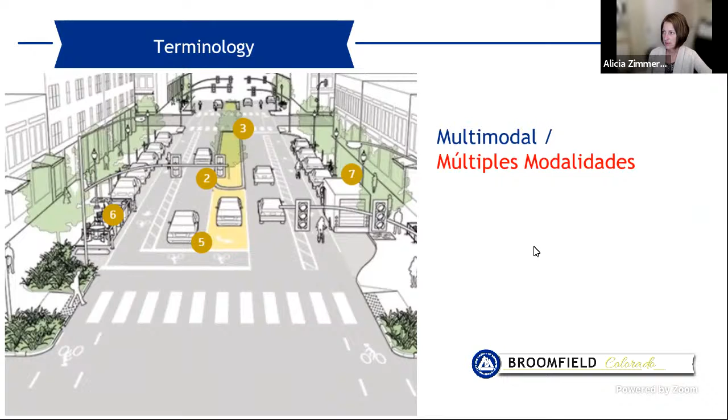The second of three terminology slides talks about what we call the back of curb. So between the curb and businesses or houses or buildings, in the public right of way, we often have a sidewalk. You're familiar with that term. If you look at this yellow brick road here, that's kind of a traditional sidewalk, set back from the roadway, and currently in some places it's a little narrower. That's what we think of as a sidewalk.

If you look at the orange stripe through here, if we had a sidewalk right there instead of the vegetation, that would be called an attached sidewalk because it's attached to the roadway. A multi-use path could be in either the orange or yellow locations and is usually a little bit wider, including people on any wheeled vehicle and those who are walking or running. So it typically adds those on bicycle into the pedestrian realm and increases the pathway. That's a multi-use path.

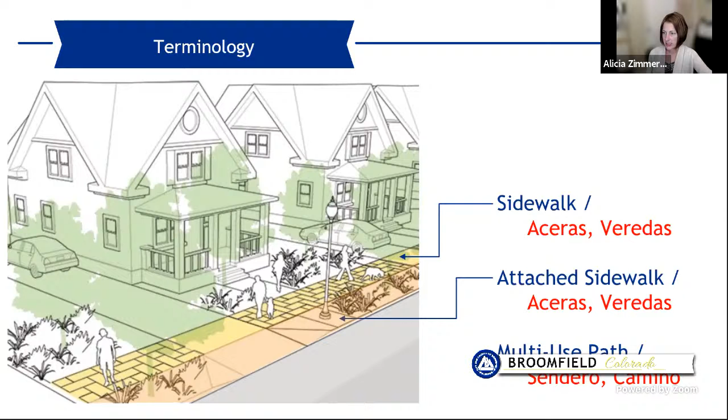The last one here, you'll look at the yellow areas highlighted for most of these. A pedestrian refuge is usually a raised space in the middle of a road, like number 2 over here, where a pedestrian can get partway across the street and be in a safe spot to wait before they proceed all the way across. The aim is to reduce the game of Frogger with a pedestrian refuge.

Bump outs, in the second bullet here, you can see this yellow bumped out area of the sidewalk at intersections. We'll talk about more details on them later, but that's what a bump out is.

Bike facilities does not have an arrow because it's a category. A facility in the transportation industry means something that is provided for a particular mode, so a bike lane would be a type of bike facility. Don't think building, but think maybe an area on the roadway or an area next to the roadway. That's what a bike facility is.

Protected bike lane is a type of bike facility, shown here as one particular type. Protected bike lanes have vertical protection, meaning vertical separation and horizontal separation away from traveling vehicles. Buffered bike lanes just have the horizontal separation, usually by striping.

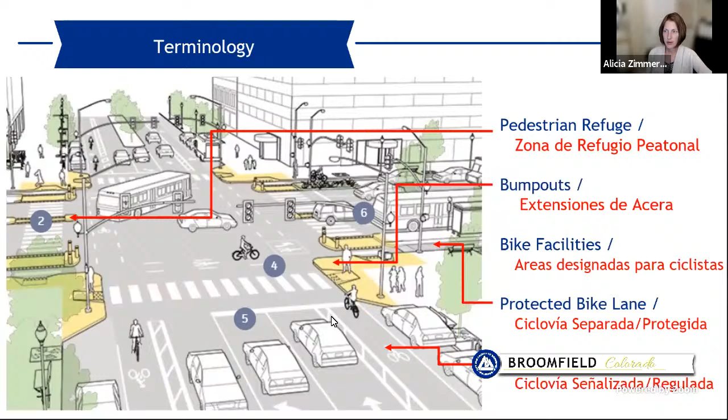So that's the end of the quick terminology intro, and I'm going to turn it over to Marc for the project background.

All right, thank you, Alicia. So once again, my name is Marc Ambrosi. I'm a senior transportation planner with Broomfield, and I'm project manager for Broomfield for the Midway Boulevard Multimodal Plan. So we're going to start off with some project background.

So we're going to begin going all the way back to the roots of what drives our transportation planning for planning staff in Broomfield, and that's the 2016 transportation plan. This document was developed with input from the public, and many of the policies reflect what we heard from them. So this is a guiding document that was really built by the people who live here, not just transportation staff or consultants.

So a few things I want to touch on, one that Alicia has already talked about a little bit. The first focus of the multimodal plan, and this was a big transition from pre-2016, was a focus on multimodal transportation. That's planning for pedestrians, bicyclists, transit, and personal automobiles as well.

The second big focus I want to talk about is planning for people of all ages and abilities. This plan establishes policies that ensure a safe, functional transportation system that works for all users. This could be children, older adults, people with mobility challenges, and really everybody. So we're really looking to plan for everybody, not just people in their motor vehicles.

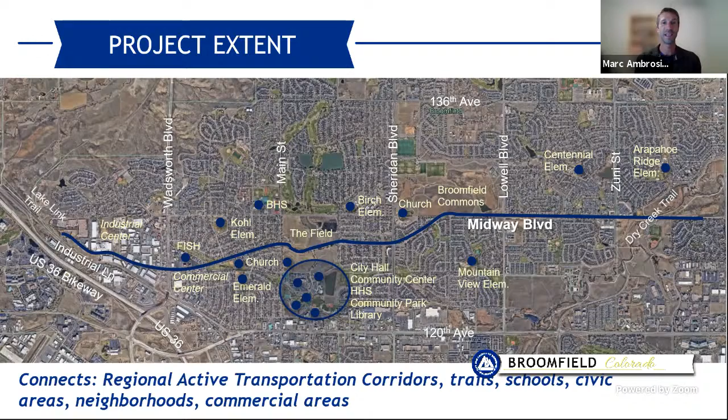So why are we doing this? We're really doing this because we need your help making this corridor safer and more equitable for everyone. We really want this to be a great community corridor. The residents of Broomfield have said that they want this to be a good corridor, a low stress corridor. Your voice is really essential in developing this study so that we get a corridor that's going to work great for the people that live here and use Midway Boulevard.

This project started in the spring of 2021. We developed a strategy for the project and how we were going to tackle this study. From spring through around now, we've been doing data collection and analysis, grabbing existing conditions. We also set up the website at broomfieldvoice.com/Midway plan, where you can engage with the project. We've been collecting public feedback in this phase.

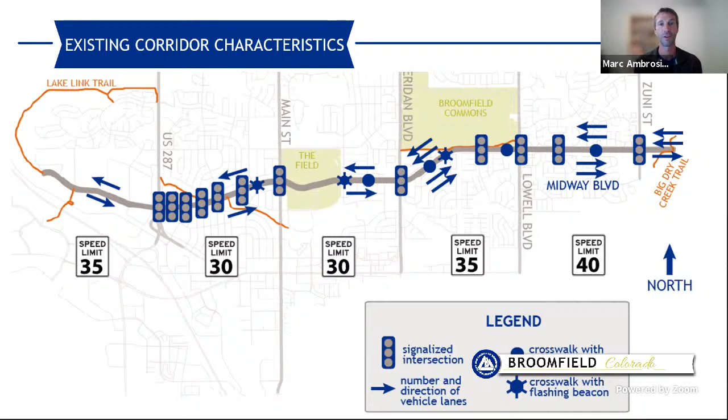What we're showing here is average daily vehicle traffic collected from the past few years, probably a 3-year average. The corridor overall has some pretty significant levels of traffic. There are lower levels west of US 287, moderate levels between Main Street and Sheridan, and everywhere else you're around 17,000 vehicles per day—pretty high levels of traffic.

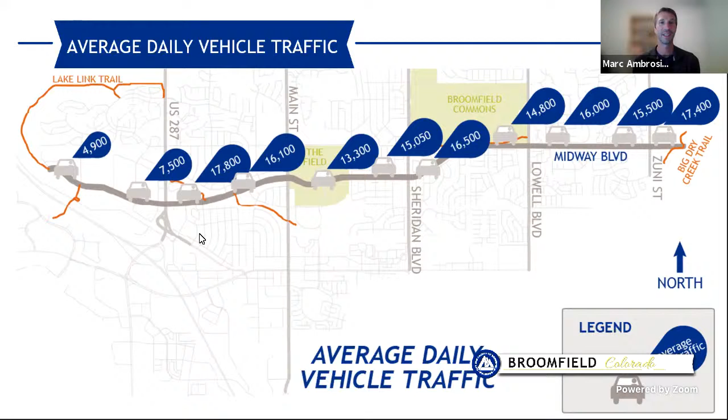This slide is a little more complex, so I want to spend a minute talking it through. I'll begin with the top half, the eastbound trips. This shows the percentage of vehicles traveling from a specific intersection—so 287, where the mouse is hovering now—all the way through to Zuni. These are vehicles that started at 287 and went all the way through to Zuni.

So 90% of vehicles starting at US 287 are not traveling the entire length of the corridor. Similarly, for westbound trips, we have a similar distribution where most trips starting at Zuni do not go all the way to US 287. About 90% of them are going somewhere along the corridor.

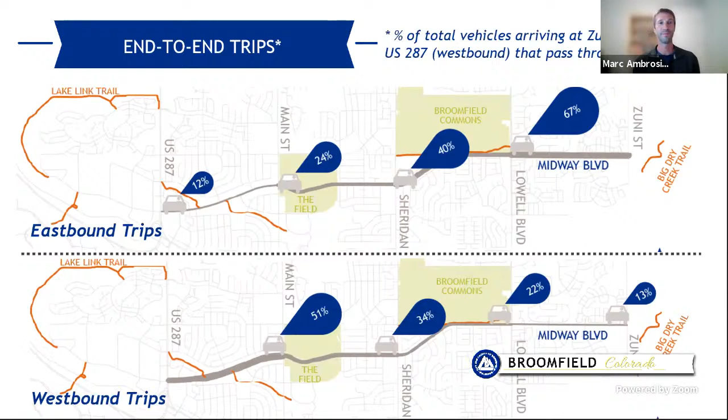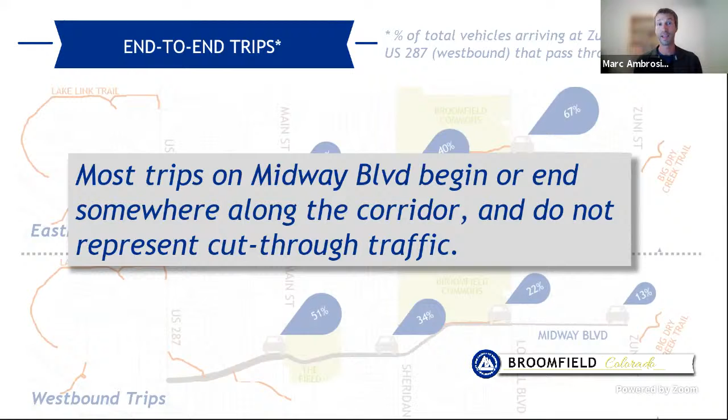So what does that tell us? We think it tells us that the traffic on Midway does not, in large part, represent through traffic or regional trips. It's not people coming from Thornton or Lafayette necessarily—this is people living in the corridor or along the corridor, traveling within it to get to their destination, whether it's their home, job, or something like that. I think that's a really important point when thinking about the improvements on this corridor and how we want it to change.

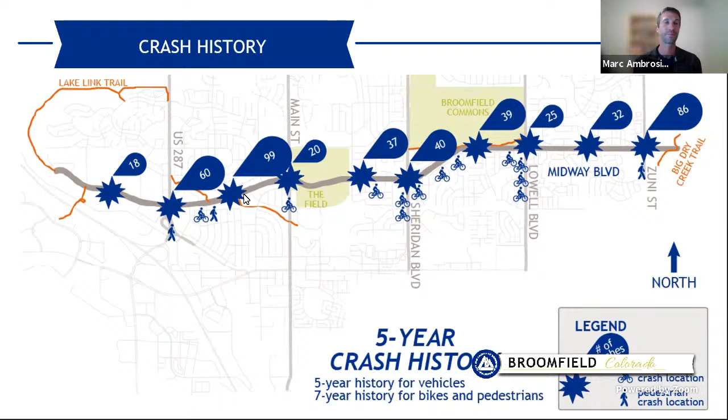All right, I'm going to turn it back over to Alicia to bring us through the rest of the existing conditions.

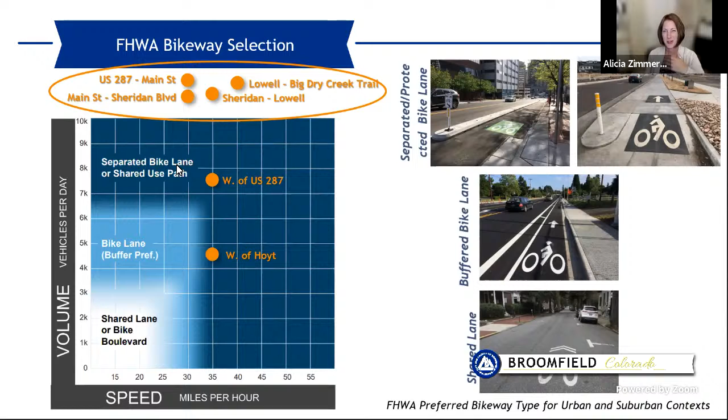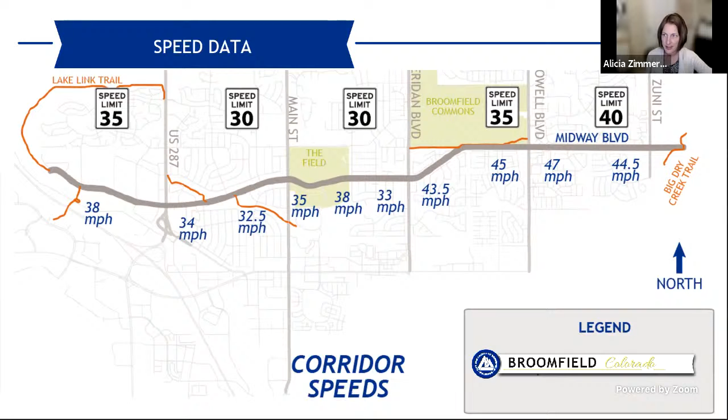All right, now I've got to get us back to the right slide here. Okay, all right, I'm going to hand it back over to Mark for the intro to our toolbox and ideas. Thanks, Alicia, and great discussion there during the Q&A session. So we are now digging into the toolbox and ideas for making improvements. I'm going to outline kind of how we're thinking about the corridor before turning it back over to Alicia to talk about some specific ideas.

So, to start, the way we are thinking about the corridor is character areas. What these are, we have grouped segments of the corridor into self-similar sections to the best of our ability. We tried not to get too many, but wanted enough to capture the diversity of the corridor. As you can see on this screen, we have pictures at the bottom showing different segments of the corridor that are all a little different. The map at the top splits up the segments as we look at them when exploring solutions to issues we find on the corridor.

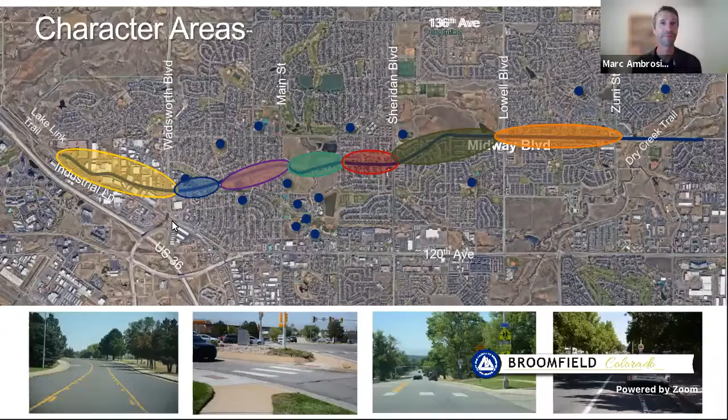So I'm going to start all the way at the west. This was that yellow bubble on the last map, the section from the Lake Link Trail to US 287. This section is pretty straightforward. It's the lowest traffic section, and there is the most heavy truck traffic. The land use adjacent to this area of Midway is largely industrial. There's a lot of pavement, and as you can see here, wide lanes. There are zero bike lanes. Sidewalks are narrow and attached to the roadway. This is kind of the section that's probably least inviting when you're taking a walk after dinner or something of that nature.

So this is a section where we have a lot of opportunity to make changes because we have a lot of space. And we would like to see this become a little more inviting and attractive for all users, not just those heavy trucks.

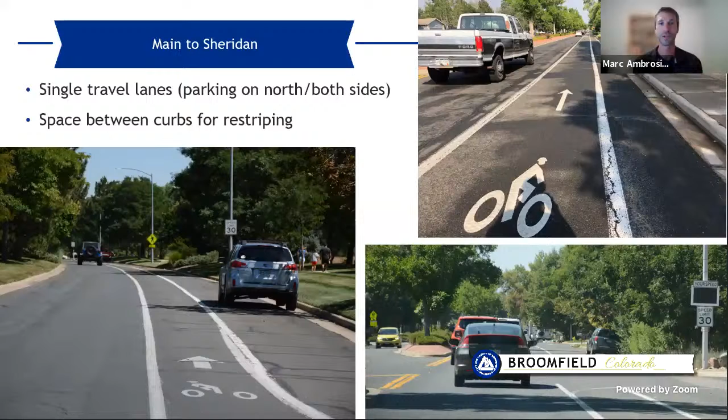The land uses adjacent to these areas are open space and residential primarily, so it's being used a little differently and looks a little different. In the space where vehicles travel, there is less space to make changes for bicyclists, and to be quite honest, it does not feel comfortable as a bicyclist riding next to two lanes of traffic. The speeds are pretty high, the traffic volumes are pretty high, and this is an area where it would be nice to provide a higher level of protection for bicyclists and potentially better pedestrian facilities as well.

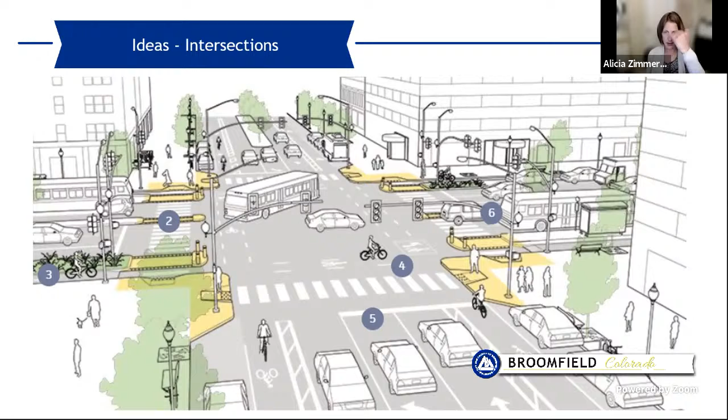I'm going to go through some ideas. They're separated into intersections, and we'll talk about intersections first. As I go through these, think about: could this be right for Midway? Could this be right for a portion of Midway? Is this just totally wrong? Does it not go far enough? I'll give a range, so be patient if it doesn't go far enough. Think about those things, because we'll have an opportunity for feedback in the last polling and Q&A.

So, ideas for intersections. One of the basic ones, which you all have some of around here in Broomfield, is a bump out. I pointed to a picture with a bump out before, but I want to tell you what bump outs can actually do. A bump out is this area here where...

Sometimes there's parking here, where the curb can come out behind the parking, often on both corners. The bump out can first reduce the distance a pedestrian has to walk across, so you feel less exposed and are exposed for a smaller amount of time, which can actually help with delay at some intersections because the signal doesn't have to give pedestrians a green as long.

It also helps reduce turning speed and even through speed. A vehicle traveling through here has increased what we call side friction, particularly if there isn't parking along here. Side friction is basically just a discomfort you feel along the side, which actually helps slow traffic.

It can help turning vehicle speeds too, because usually the radii, the curb corner, the round part, is different - the radius is smaller. So you might have to take the turn at 5 or 10 miles an hour instead of 15, which helps you see a person crossing the other road more easily. So it can help with speed mitigation and reduce crossing distance.

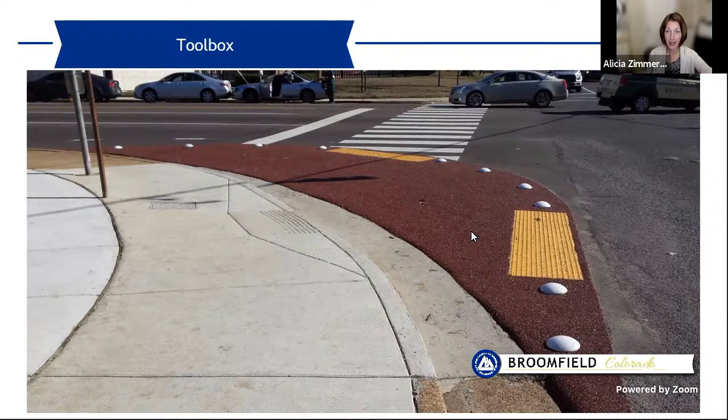This one is a little different, kind of a funky implementation, but it's here to show that bump outs can look very different. They can use temporary material, permanent material, or more visually impactful material. The previous picture I showed - what I failed to say - can also provide additional space for landscaping or art, kind of what they call placemaking, making something really a place. This version is a little more temporary, and it also allows trucks to turn over it, so there are nuances in designing to make sure everyone who needs to can get around the corner.

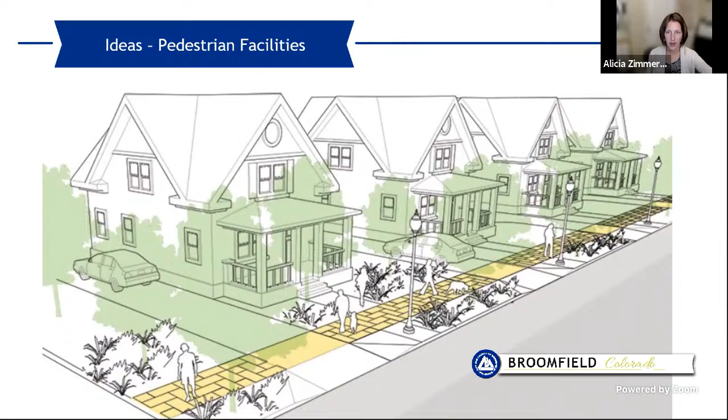So there are many ideas like this in some of the new guidelines we'll be considering as well. Okay, if you're still with me, we're going to talk through pedestrian facilities and then one other section next.

Mark talked about some of those wider sections, almost as wide as a multi-use path, while some sections have narrower sidewalks. So the first thing we'll look at is whether sidewalk connectivity and widths are sufficient for a comfortable pedestrian environment. If they aren't sufficient, or if we need to widen it to become a multi-use path, there are some gentler ways we consider widening. Where we have room to expand those locations with concrete, that's easiest to maintain and easiest to use. But there are more park-like ways of expanding those that reduce the impervious area a bit.

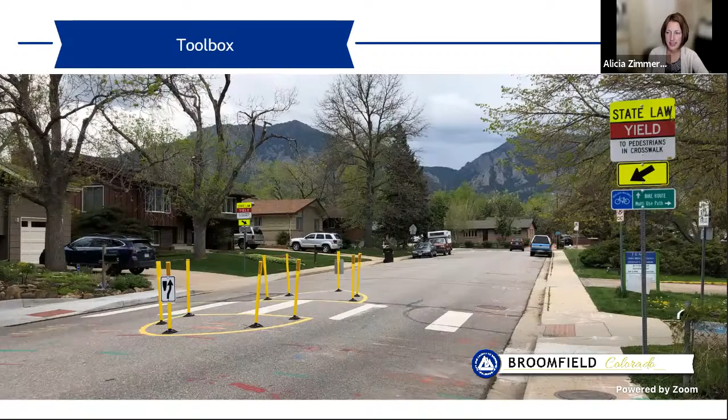This slide just shows you can do some of these treatments in a temporary or fast action, quick implementation method as well, with posts and marking signage, paint on the ground, and in this case, some additional brightly colored signage as well, which is per guidelines.

I want to make sure too that you don't just think of this from what can we put on the ground or what physical change can we make. We are certainly considering what we call operational changes. Outside of infrastructure changes, operational changes can change the number of seconds that each direction of travel can go, the number of seconds you get on green if you're in a car, or the, you know, man hand, what we call the white walking person when you're a pedestrian.

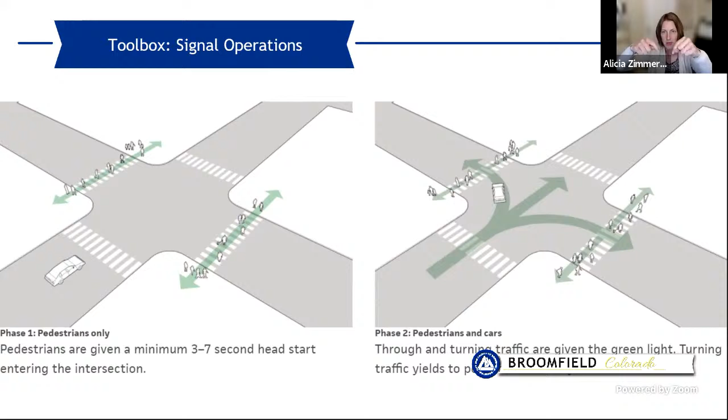This example, just the diagrammatic example, is what we call a leading pedestrian interval, LPI. All it means is that pedestrians get to start going. All the signals are red for vehicles in all directions, and pedestrians get to start going until they're partway in the road before that parallel traffic that might have that conflicting right turn goes. So these pedestrians get to go just a little bit so they can establish themselves in that crosswalk before a vehicle traveling this way gets a green light and could potentially turn right across them. It reduces the cartoon-start, both-starting-at-the-same-time challenges.

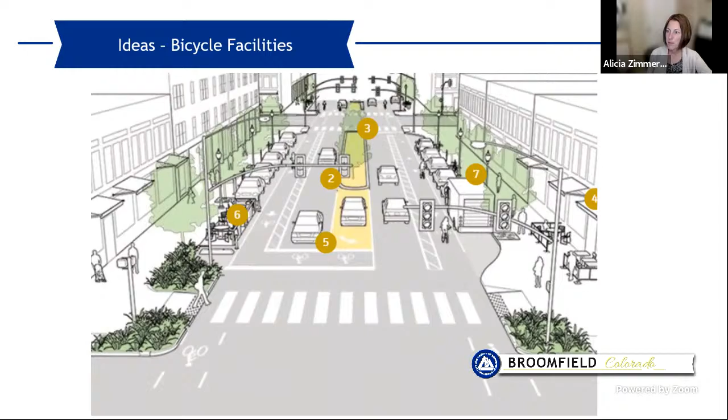We've seen some of these pictures already through some of the other sections, and that's kind of an important part, is that all of these systems work together. You see a refuge island in the making here. This is a buffered bike lane, and it also has some green paint. Right now, most communities are using that green paint for marking conflict zones, meaning a location where somebody driving may anticipate intercepting somebody who is on a bike, or somebody biking may say, hey, this is where a vehicle may cross. The other thing you see here is actually conflict marking for a bus stop, so you can actually make these bus stops and the bike facilities get along as well.

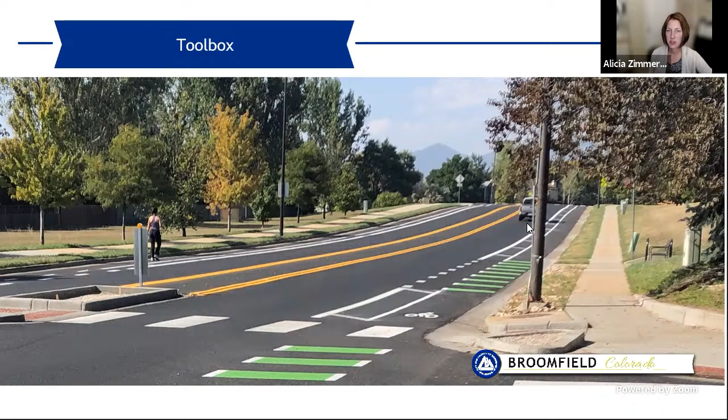One other thing I wanted to point out here is that bicycle facilities being added to a roadway can help pedestrians as well as motorists. If you're having these interactions, cleaning up that delineation and separation can help people driving cars know when to expect a bicyclist. It can actually add separation for somebody who's walking on the sidewalk. They might have been walking pretty close to a 40 mile an hour car, but adding in this bike facility means they get additional separation from the moving motor vehicles.

They just give cars a little bit more reason to shy away, and they give people riding bicycles a little bit more comfort. One thing I want to point out is that the more people you get to ride bicycles, the more predictable it is for both people driving cars and riding bikes, because you have more bikes out there. The person driving the car learns to expect a bicycle there. It's not just that random bicyclist every once in a while. So this is one type of protected or separated bike lane.

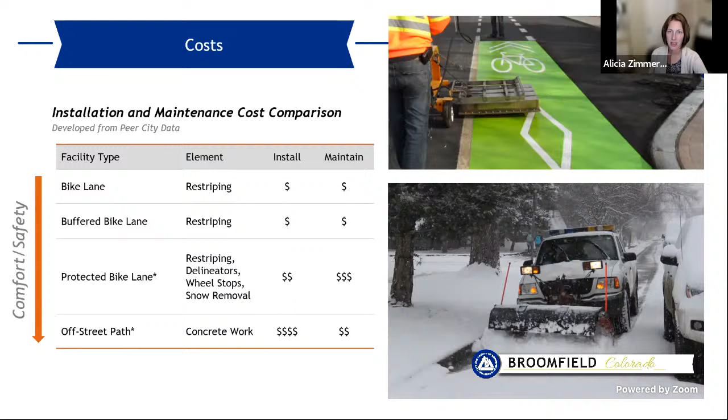I have this comfort and safety chart. It's not 100% proportional, but comfort and safety kind of increases as we go down the table here. Bike facilities specifically, simply restriping, is obviously the cheapest to install and maintain. Then getting down to an off-street path or a protected or separated bike lane, these have different installation and maintenance costs that we need to consider, because I can't really rightfully say, hey Broomfield staff, we decided on something that you're never going to be able to implement or maintain. So we're considering that as we move forward.

Okay, I've got to take a break. We have a polling session and a Q&A, but one of my team members stopped me to ask if we shouldn't move straight into the poll here.

All right, okay, I'm going to pop up the poll. This is our last polling session, and we have two questions up on this one as well. What we're going to ask is about the ideas we presented. Basically, are they applicable to Midway? And the second question is, would they make Midway safer, more equitable, and more comfortable, or do you just not agree with that at all? On these polling questions, we ask you to share ideas and thoughts in the chat, so feel free, this is the time to do it. Say, yeah that's great, or I hated this one, or I could see this particular idea in this particular segment. So I'm going to go ahead and launch this poll. Okay, should be up.